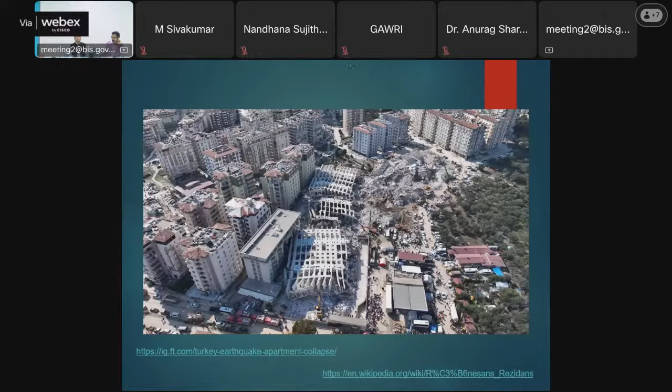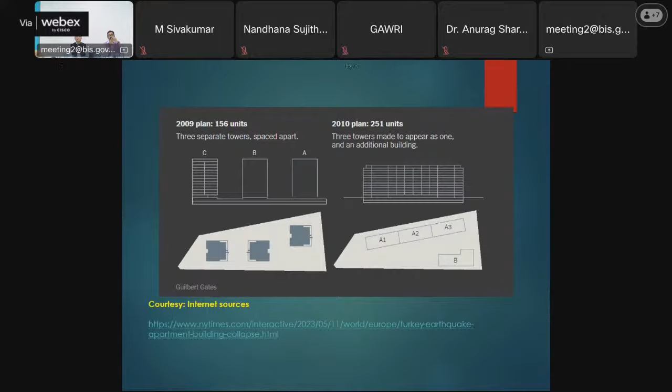There are some links in this particular one; you can see these links later on also. There are some interesting facts about the failure of this building. This was the initial plan: 156 residential units were to be constructed in 3 separate towers with a common underground parking. But ultimately over the next year, there was a change in the scope of the building. It got converted into one long block and one additional block. This is always permitted. This is always doable. Only thing, we have to re-engineer. Did they do this re-engineering or not? That is what is given in the link down below. But I'll just mention what are the perspectives.

The municipal advisor, because at local level all the building plans, their services, their structural drawings are submitted and examined and building construction permit is given, said, such a complex building, I do not have the software. That is one perspective. The other person, the inspector who has to go to the site every now and then, right from the foundation pit depth up to every floor casting level, said, I have signed many papers, but not of this building.

Most important is a faculty researcher who said, why wait until earthquake? This is a puzzling building. It should have fallen well ahead. Till date it was there. That itself is a miracle, because there are a lot of structural issues in this particular building. There is no continuity of vertical structural members up to the foundation level. And more importantly, the contractor or the builder, of Renaissance, says that I followed the codes, but the regulations were insufficient.

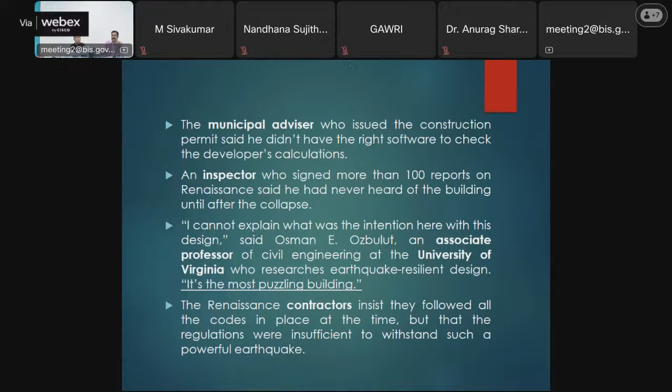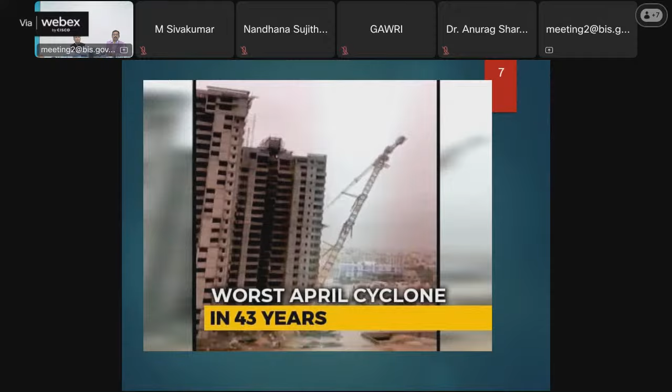This view of the builder was not legally correct. Ultimately, it went into a legal tussle, and the owner was put behind bars. Unnecessarily, people were put to danger, and some of them even lost their lives. Of course, in our country, we do all these things. We follow the engineering practices, and considering the flora and fauna, we ensure that good buildings are happening. But we are also planning for all these worst cyclones, lightning, thunder, etc.

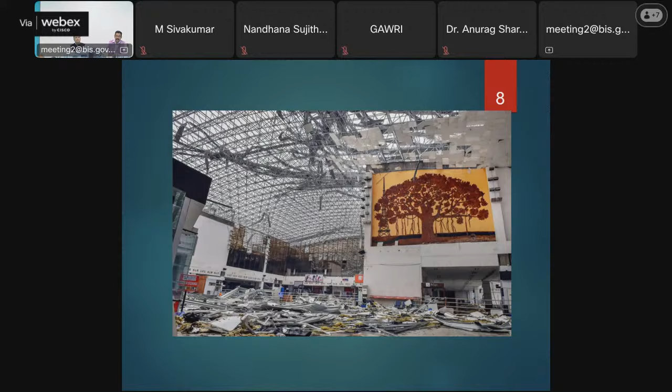So, but the Indian standard provisions say in IS 875 or in IS 1893, which is getting revised, all of these are giving you safe provisions to ensure that your buildings are safe. This is a simple jointing issue. The structure is intact, but it was not secured to the parapet wall. So it just flew away during the cyclone.

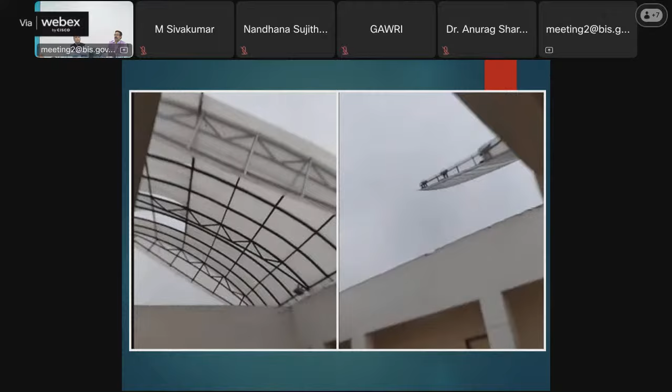So I'll stop here. All these can be very much avoided if, for example, the detailing practices can be done by the person, the structural engineer, the site engineer, etc. So these things should be avoided. So what as a building code is this BIS giving to each one of us, say as a student, as a professional, or as a researcher, etc.

To explain to us about these building code provisions, I am formally excited to invite our engineer Amandeep Garg ji, who is the managing director of Creative Design Consultants and Engineers Private Limited, based in the NCR region in Greater Noida. He has his own team of more than 45 engineers, architects and professionals, and he has been a member for more than 15 years of various standardization committees in the Bureau of Indian Standards, be it on earthquake engineering CED 39 or CED 7 on structural design, and importantly, he is a member of many panels on the NBC on structural design.

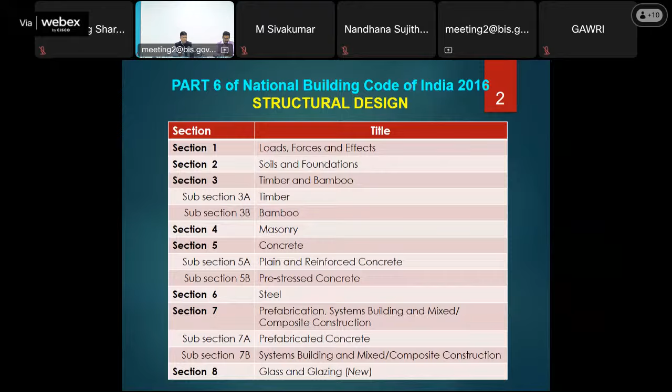Now, coming to the load forces and effects, section 1 of this part 6. In this, generally, we consider different types of loads. The NBC guides us about the different loads that we have to consider. IS 875 gives us proper guidelines about how to take the different loads and effects into the design calculations. As our current way of structural design is force-based and prescriptive in nature, we have to calculate everything based on the available codal guidance on loads.

IS 875 Part 1 is about dead load; it basically gives the densities of different materials so that we can calculate the dead load on the structures, or sometimes the self-weight of the permanent structure. Part 2 is the imposed load. IS 875 Part 2 guides us for buildings which may have different areas and applications. A building may be a simple dwelling, an office building, an industrial building, a hotel building; it may have special requirements like large kitchens or large libraries. So for different functional uses, there will be different imposed loads.

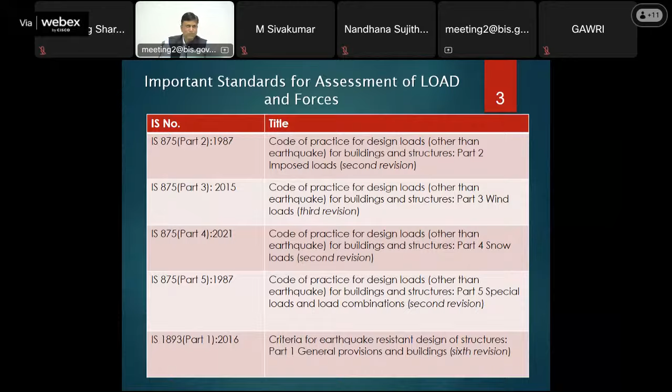Now coming to construction materials. When we talk about materials, masonry comes first in our mind because it has been traditionally used. So in masonry, when we have to design safe buildings, especially with unreinforced masonry, IS 1905 gives us very good details, and our National Building Code 2016 covers all the structural requirements in detail for masonry design. I would suggest that every engineer should read IS 1905 once, because generally this standard is missing in our college curriculum.

In our urban, non-urban and rural areas, a lot of buildings which are not high rise, maybe 1 or 2 story buildings, are constructed with masonry structures, load bearing constructions. More than 50% of constructions in our country have been with masonry, but our engineering colleges have not been teaching this. IS 1905 is a very comprehensive, excellent document for everyone to read, explaining basic concepts of masonry structure design, slenderness requirements, brick strength, mortar selection, and opening requirements. This is the good document for designing load bearing masonry construction.

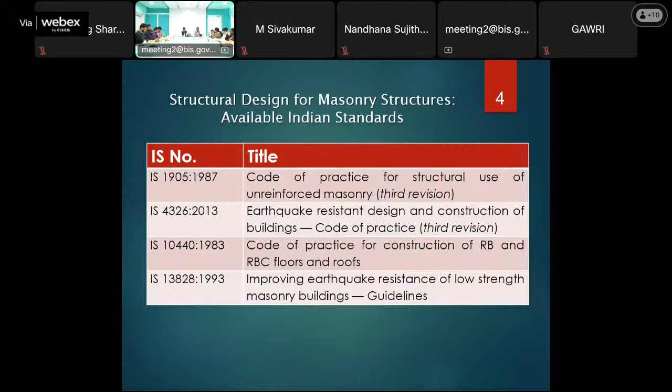Now coming to the popular standard IS 456, which we have been using for design of RCC structures - plain and reinforced concrete structures. I will be discussing many things further in this session. This is the basic code which guides us on how to take care of bending moment, flexural forces, tensile forces, shear forces, torsion, and in-plane and out-of-plane forces and bending moments. All these things we deal with in building design, taken care of by IS 456 guidelines. IS 13920 is again a very important document, which I will discuss regarding important aspects of earthquake safety.

This standard was earlier published in 1993, and during my graduation phase, it was just recently updated. Something called ductile was not a concept in the engineering fraternity before that, and then it has been updated in 2016, with a lot of improvements being done for these ductility parameters.

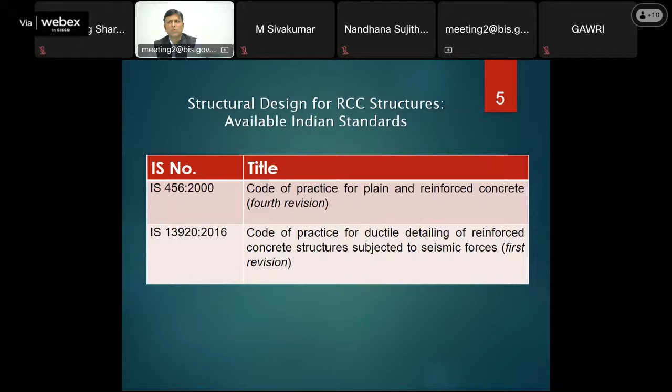So this document gives us a complete detailing system which can help us in earthquake safety. I will be talking about this during some discussions.

The crux is that in our country we have a lot of constructions which are non-engineered and some which are engineered. Non-engineered constructions are those which are not following engineering principles or structural design parameters, and are traditionally built based on the wisdom of artisans or whoever is making them.

Sometimes we call them mason or Rajmistri. So it is up to them to decide, and the building owner does not know how to construct. They just give the work to some agency or mason, a so-called expert who has no engineering knowledge but has learned through traditional construction practices from their fathers and forefathers. These are non-engineered constructions, and some people still believe this is good enough for their small construction.

But I would like to mention that if there had not been changes in construction systems, probably non-engineered constructions could have been accepted. But now everybody wants more space, so the thickness of walls is getting reduced. People want larger rooms, so spans are increasing. With these changes coming up in construction, without any computation of forces, bending moments and engineering know-how, somebody may go wrong based on their experience alone.

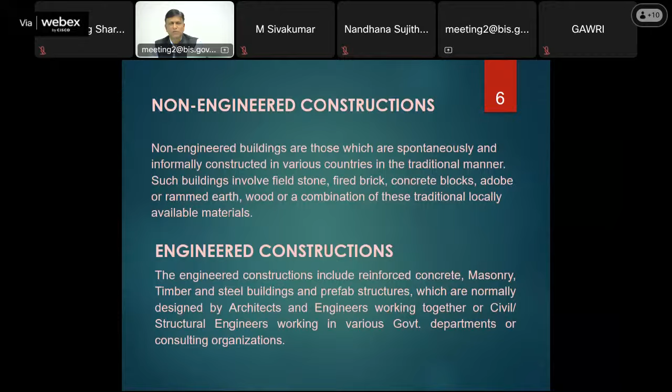They cannot compensate for the requirements of thinner construction and larger span constructions. So we have to move the entire country towards engineered constructions, whether of masonry, timber, bamboo, or anything else—it has to involve thoughtful design, calculated forces, calculated risk, or calculated safety. If we know the behavior or performance of what we are making, then probably we will be going in the right direction.

So we have to move towards engineered construction. And for engineered construction, what should be our aim? Our aim should be that structures perform satisfactorily during their intended service life.

I used the phrase intended service life because, as I discussed, some structures may be temporary construction with maybe a 5-10 year life. Some may be for 50, 60, 80 years, and some may be for more than 100 years. So whatever the intended service life, the structure should perform satisfactorily. This should be the first aim of engineering design or construction.

The second part is to sustain all kinds of loads and deformations of normal construction and use. Why did I use the word deformations also? Generally we calculate for forces, but there will be some deformations as well—due to temperature, we will have high temperature expansion, winter season shrinkage. So there will be some deformations.

There will also be some ground movements. We will discuss this further, but here I would like to point out that when we define a soil bearing capacity, it is defined along with some ground settlement—there is nothing called zero settlement SBC. So when we talk about different foundation systems, we thoughtfully consider what could be the allowed settlement for a kind of foundation system, and based on those settlement assumptions, we calculate our SBC.

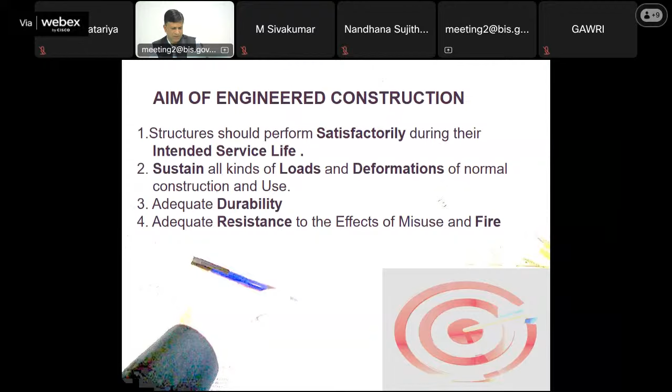Sir, if I can ask you a question here. There are reported incidents of fire in some buildings, be it residential or commercial. What is the actual procedure to permit continued occupancy after that fire incident? Is it simply firefighting and replacement of electrical fittings, or what should be done?

It's a very, very important question you have asked, Arunji. Generally, what happens is that after the fire, there is a lot of dark smoke in the room, and after the firefighting, people just clean the room, change the electrical installations, and start using the building as if nothing has happened.

But I would like to mention here that because of the fire, if it has been strong enough to give heat to the RCC elements, maybe columns, slabs, or beams, this heat, if it has raised the temperature of the RCC elements, can reduce the strength of these structural elements to a greater extent. It can badly affect the concrete strength as well as the strength of the reinforcement steel inside.

Because nowadays we are using steel of higher grade, say 500 grade or 550 grade. If this kind of steel reaches a temperature of more than 400 or 500 degrees centigrade, and then cools down, the strength of this bar may not be the same. It can go down by 10 to 20%, and sometimes with exposure to higher temperatures, the strength may go down by 30-40%. So the overall load carrying capacity of the structural members can go down.

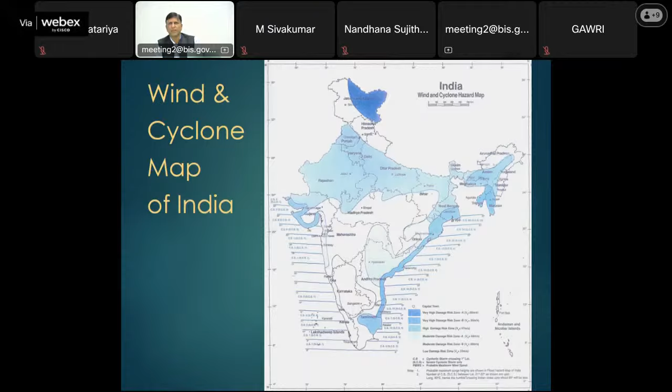Now, generally what happens is that when an engineer not having much exposure to how to design for the wind forces designs it for the gravity loads, for small buildings or small sheds, generally the gravity load is very less, because the sheeting has very less load, these steel structural members have very less load. So maybe you are getting, say, 1 ton load at the base for a column. Now for 1 ton load at a base, maybe you are requiring 300 mm by 300 mm size of footing, 1 feet by 1 feet.

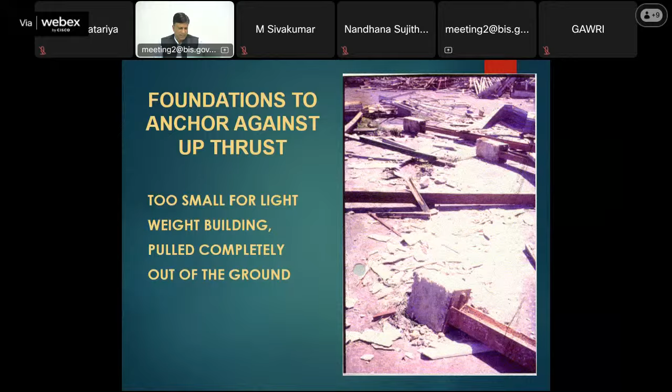Now you see this photograph. This is a simple portal frame system. And in our colleges, generally we learn how a portal has to be designed, for the wind forces, for the dead and live loads. And what is generally done is, suppose we have a portal at every 5 meters. So we take the design loads for 5 meters, design one portal and repeat. For many of our PEB structures also, this practice has been common, and in many countries this practice is being followed. Now, a few designers generally do the 3D analysis of these structures.

If the buildings are complicated, with different spans varying, then of course people generally do 3D modeling. But for simple portal design structures like hangars or these kinds of warehouses or normal buildings, generally people do the portal frame analysis, design the portal and repeat it.

Now what happens is that our code and the National Building Code suggest that in that case, we have to provide some bracings at adequate distances, adequate spans, because we have designed for this kind of wind, but if the wind comes from the orthogonal direction, the longitudinal direction, then what would be the capacity of your structure? Because in the other direction, you have not tied the system in a proper way. There is no proper resistance for our structure to resist that orthogonal force. So we have to provide the bracing.

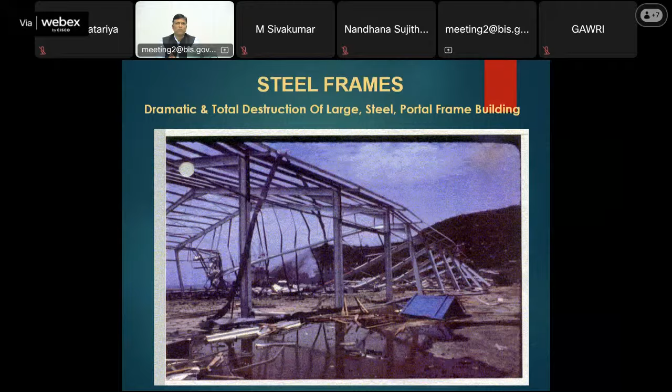And I would say that it was such an effect that the sheets which flew from one part of the building could reach almost half a kilometer away, putting danger to a lot of other people who were on the roads, because this metallic sheet, heavy and with very sharp edges, when it was flying like a kite, could harm so many other people. So it's a very, very risky thing. So what is the problem here? Why do these kinds of things happen?

Now, what happens is that in structural engineering, when we design, generally many structural engineers design for the portal system only. And they say fix the sheet as per the requirement, because sheet thickness and fixing details, etc., structural engineers generally were not considering as part of their scope. It is just the sheet and the contractor should fix it. But it's a structural element. In India, I have shown 6 different wind zones. So there may be different severity of the wind that the sheeting has to face.

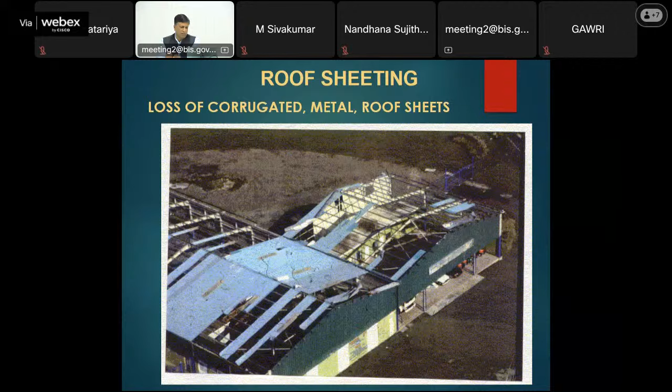The thickness also sometimes becomes inadequate if your spans are more or something like that. So sometimes you have to increase the sheet thickness also, because sometimes it is not just the failure of the anchor, sometimes it may be a failure of the sheet itself. So you have to see what should be the thickness of the sheet and how we have to make the fixing.

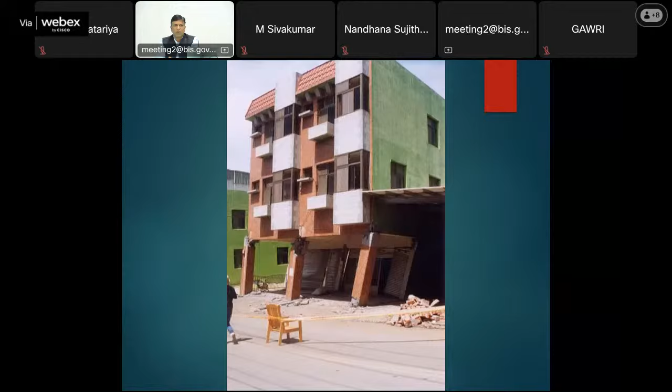When we have stilt floors, sometimes we have soft story. It is not that all stilt floors would have soft story, but stilt floors have a tendency to have soft story. Soft story means the difference between the upper floor stiffness and the lower floor stiffness is large. So based on the stiffness differences, the building oscillation may vary.

Stiffness is resistance to deformation, right? So the upper part of the building has a different resistance to deformation and the lower part has a different resistance to deformation. So what would happen during an earthquake? The earth is shaking and the building will also try to shake as per its stiffness with that earthquake force. And within the building, if there is stiffness variation, some part of the building oscillates in a different manner and the other part can oscillate at a different frequency or time period. So what happens then?

Suppose the lower part is going this way and the upper part is going this way. This can happen because they are not oscillating in sync. There is no synchronization of the complete building because of the stiffness variation. So the lower part is going left and the upper part is going right. Then what would happen? There will be a shear force or a tearing force. When we use scissors or a knife, what do we do? We have a tearing force which gives us the result.

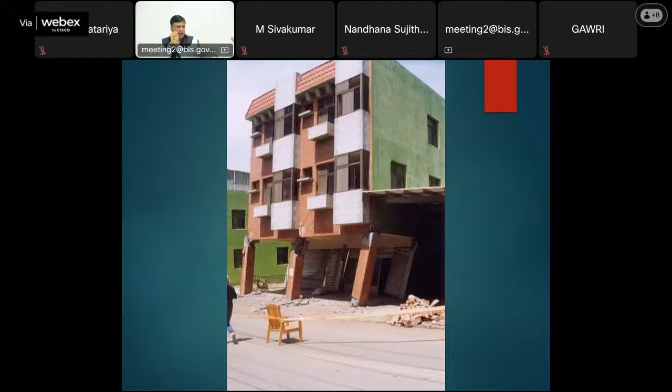So buildings themselves can experience these kinds of forces. The lower portion goes one direction, the upper portion goes the other direction, and this is the situation we see in this building. So how do we avoid this? The National Building Code and IS 1893 guide us that no such soft stories should be created in the building. Earlier, some engineers had the approach: if we have a soft story, let us make the soft story strong.

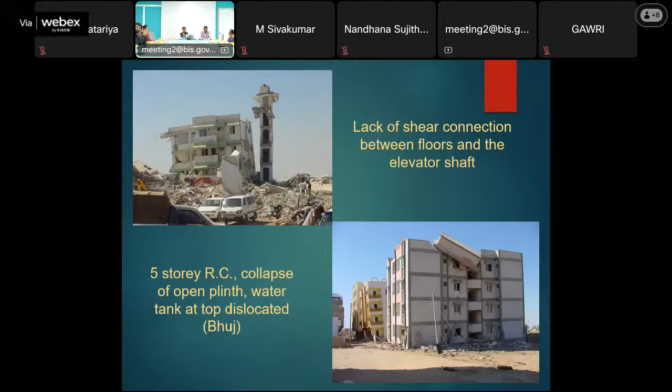Some people say that for small buildings there is no risk of the earthquake. But I am showing you the two pictures that even a small building, the government building, railway station building, if the structural systems are not proper, if the construction is not good, if the design is not proper, then anything can happen, even for the smaller buildings.

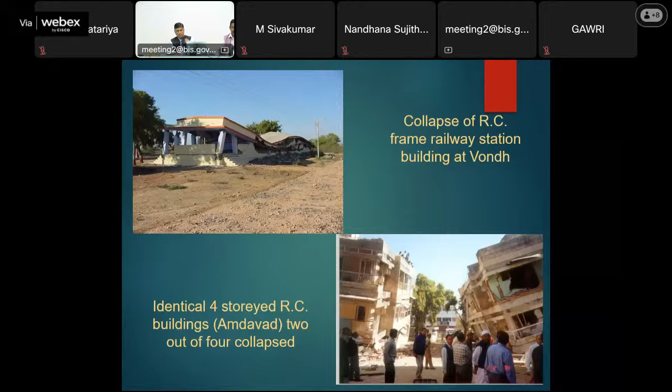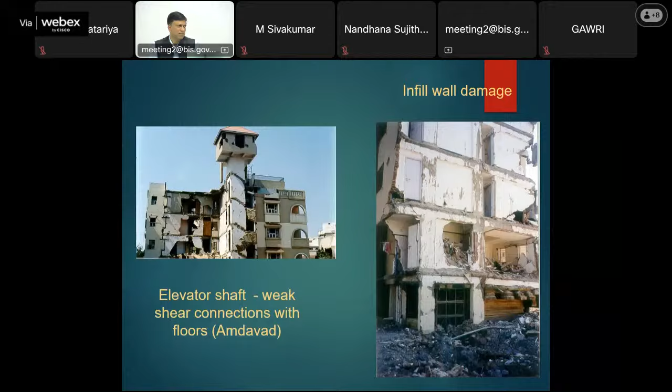Similarly, for other buildings as well, we can see this kind of images, which are eye-openers for all of us, that when we do not make proper connections, when we do not take care of the earthquake forces, or when we do not take care of the other forces as well, there will be some deformations, there will be some kind of aging effects also in the building, and if you are not maintaining it properly, then the building deficiencies can result in a lot of challenges.

Now, when there is an earthquake, you have folded something like this. So this is a box, I have folded it like this, and if there is an earthquake, it will shake like this. So this farthest part will have a lot of amplification. If this fixing had not been there, then it could have movement like this. But because we have fixed it from somewhere, it has moved like this. So this connection of the staircase has not helped, but has made this building fail during the earthquake.

So we need to imagine in our mind how the building would have its deflections or deformations when there will be an earthquake. And the earthquake force can come from any direction to any face.

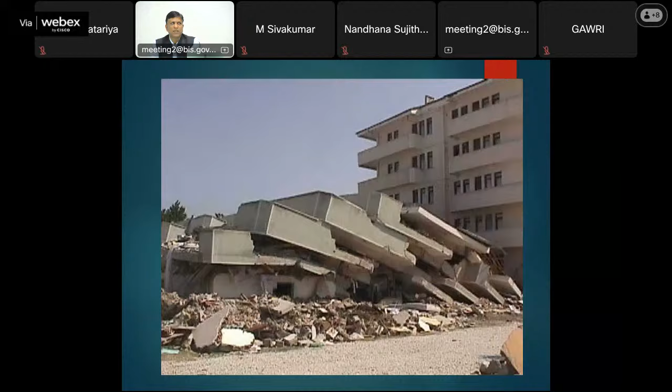So as Arunji has shown in the beginning also, there was one photograph wherein we could see one building failing and other surviving. Similarly, this photograph also gave us that clarity that if we make good buildings, they would survive. If we do not make or design good buildings, the buildings cannot survive and would fail. So at the same location, one building has failed like a pack of cards, and the other buildings are surviving without any damage. So who is creating it?

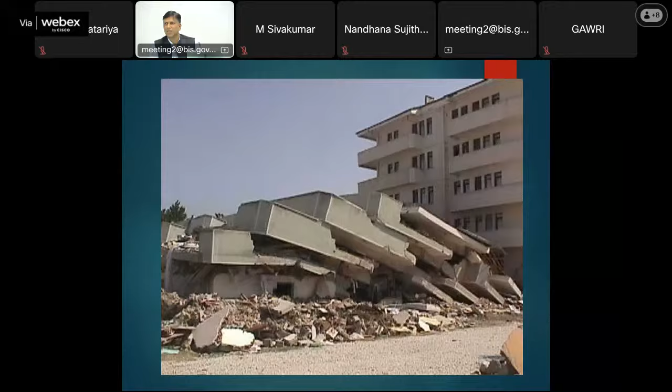We all engineers. We all engineers are responsible for failure as well as good performance. If we are not doing good work, we would see what is on the left side, and if we do good things, we will create something for the country which is on the right side. So the moral of the story, you mean, is read the Indian standards and read the building codes and do your design and your site work and execution also as per the Indian standard.

Thank you, sir. So quickly, another 5 minutes, I will try to take some more points. So ultimately, we have to be competent enough to do a good thing.

For that, we should have good attitude, skills, and knowledge. This BIS has been continuously striving to put more knowledge and skills for the participants, and you participants should have the attitude to learn and implement. If you implement all these skills and knowledge, then definitely we will be in safer hands.

I would now quickly take you through some slides which are part of my presentation, but will not discuss much, though it would be helpful for you to have some insight about these things. For good engineering development, we should have a holistic approach of having good design, selection of site, concrete technology, or whatever system of structural design we are having, drainage, waterproofing, inspection, maintenance—all these things have to be there.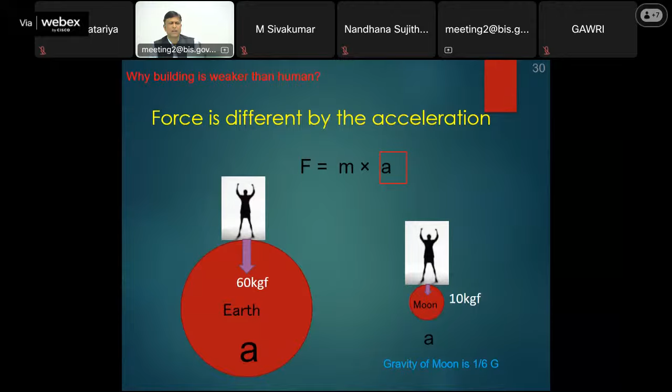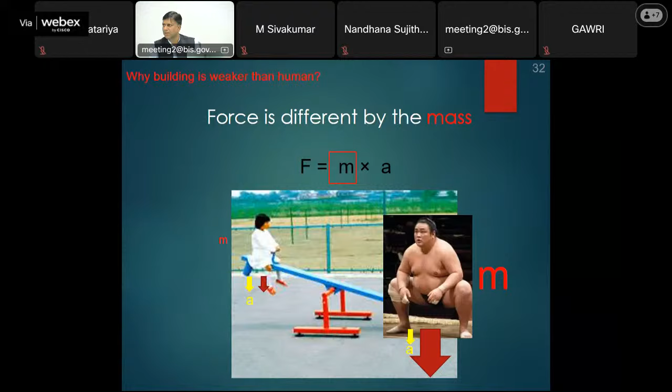These are the conditions of our earthquake. As I discussed, heavier buildings will have larger earthquake force, lighter buildings would have lighter force, because mass is important—it is the force created because of inertia, and inertia is mass into acceleration. If you have larger mass, you will have larger earthquake force, and if the ground acceleration is high, the force will be higher. So some slides are just to explain this inertia process.

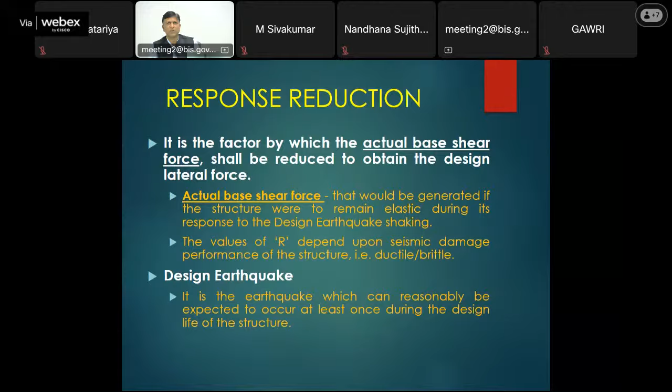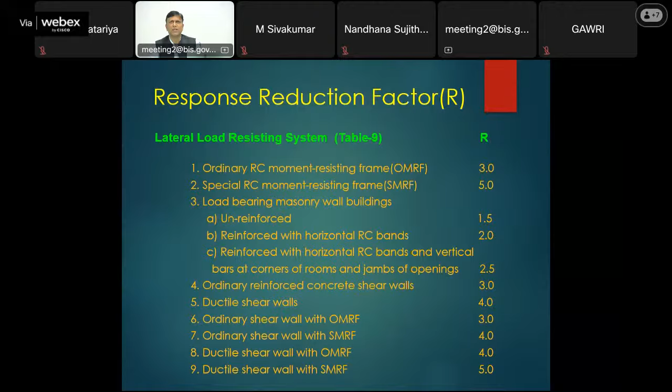This response reduction factor is an approach used in structural design. It is basically applicable for structural designers, so I would not take much time for that. These are the things used for earthquake force calculations.

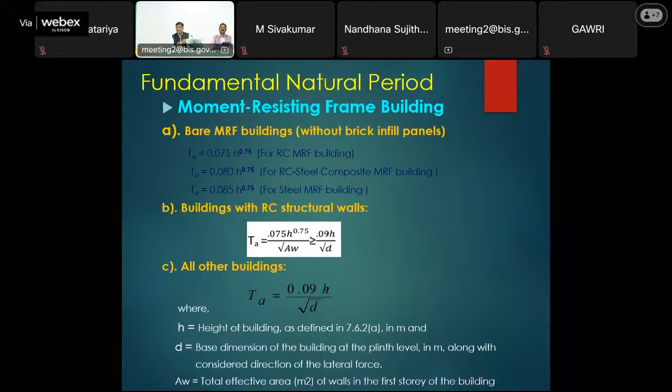Time period, the natural time period of the building, is important to understand. The code gives you the formula to calculate the estimated natural fundamental time period, which can be used for calculation of the force. I must tell you that at this moment we are designing based on the force system, but it may not be very far that we would design in a different approach, wherein we calculate not based on force but based on deformation, deflection, or performance. So it is now high time that we develop ourselves to have more knowledge about earthquakes and their effect on buildings.

So these are some slides which guide us on how to calculate, and the attributes needed to perform well during an earthquake. Our structural system should be very robust. As I told, we should not have any scope of soft story or weak story. There should be good lateral elastic stiffness so that our deformations are not too large, and required adequate lateral strength so that in case of lateral deformation, our building structural elements should not fail. It should have adequate strength and adequate ductility.

Now, ductility is very important to understand, and many people do not properly understand ductility, but just do it as per the guidance. Ductility is a kind of property given to a system which allows deformation without failure. So by providing ductility, we allow more drift or deformation, but the structure remains stable and sustainable. For economical design and high performance design, adequate ductility in the system is going to help us.

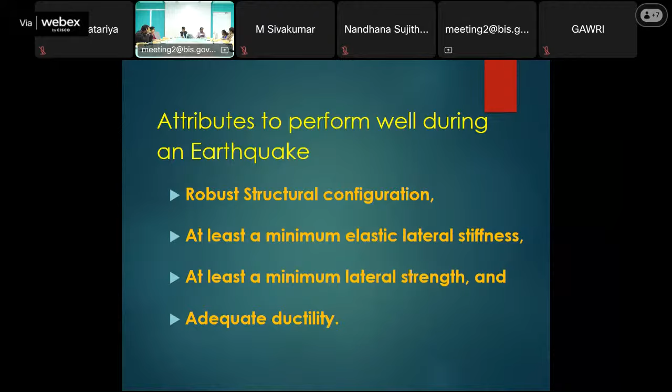Now, some people would say that the Taj Mahal or many other buildings constructed hundreds of years back were not designed with ductility, so why does the IS code or our systems push for ductility? So we have taken some slides to show that we can have both systems: one is strength-based and the other is the ductile system. As per IS 456, we can design it either way.

But the difference is that with a strength-based system, our structural elements become very thick and the requirement of steel will be high. Then during an earthquake, if the force is slightly higher than designed for, the structure will fail. But when we provide ductility, we allow a lot of deformation, which saves money since structural element sizes reduce. You provide junctions to handle excess stresses also. Generally, when we design in the elastic zone, we restrict stresses to that zone only, but when we provide ductile detailing, our stresses can go beyond linear action.

It can go to the non-linear action. It can have some deformation at the junctions, and some steel can yield. Because of the yielding of the steel, a lot of energy from the earthquake can be absorbed, and your building can be saved from failure. So there may be some connections that get broken because of yielding at some locations, otherwise the building will be safe. So you are saving money as well as providing better safety. That is why we insist on ductility.

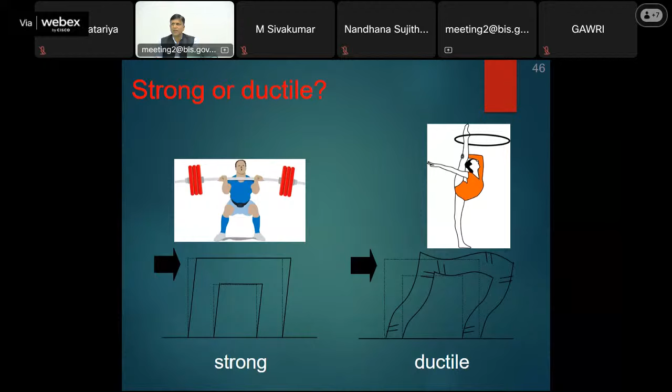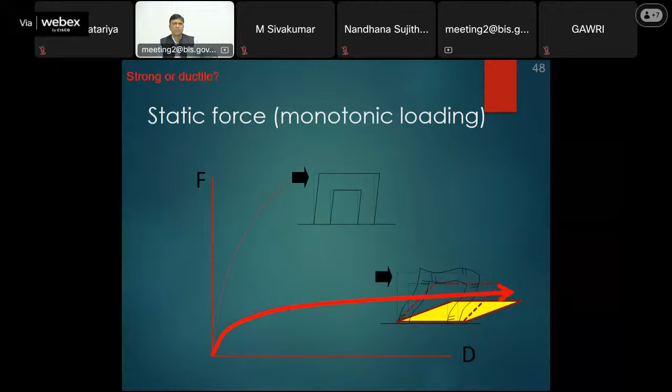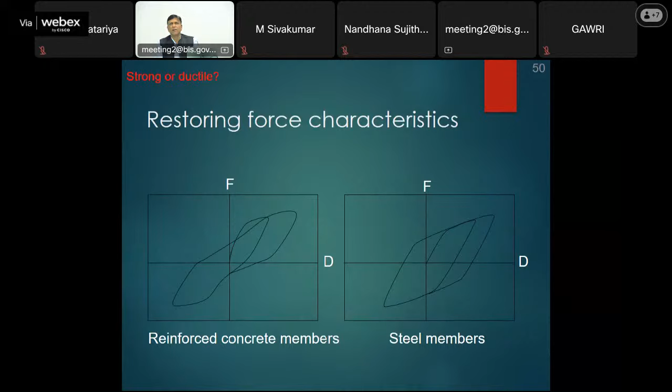I will not take much time. These are some comparisons of how ductility can help. The energy absorption in a ductile system is fairly high. The area we see here is the hysteresis loop, which gives good performance when designing with ductile design. In case of non-ductile design, this hysteresis loop is not well defined and your structure can fail very quickly. So in this slide, the bottom part, the flexible or ductile part, has a lot of energy absorption capacity, whereas in the strength-based design, you have very little capacity for energy absorption.

Generally, without earthquake considerations, we probably feel good with strength-based design. But when we are in earthquake zones, we cannot take that chance.

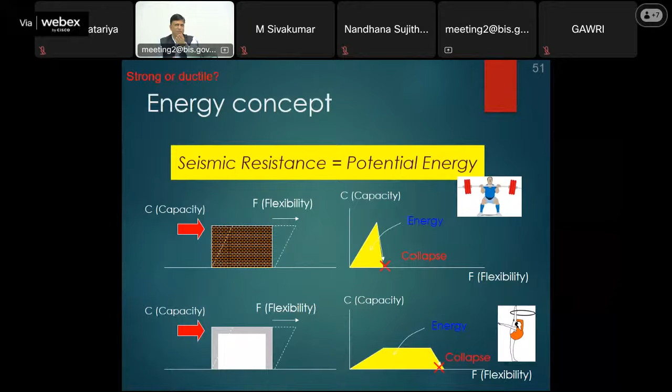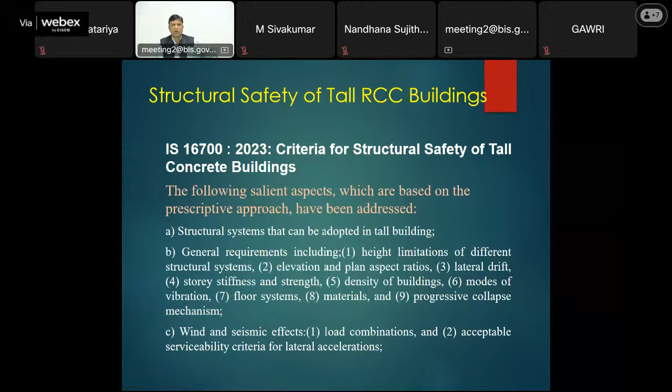So these are some earthquake safety requirements. I am just skipping through. We have a special code for tall buildings, IS 16700, which gives us the structural system, analysis part, detailing part, and all the special requirements for buildings having more than 50-meter height. These are covered in IS 16700, and this is also very important when we go taller. These are the special requirements for ductility.

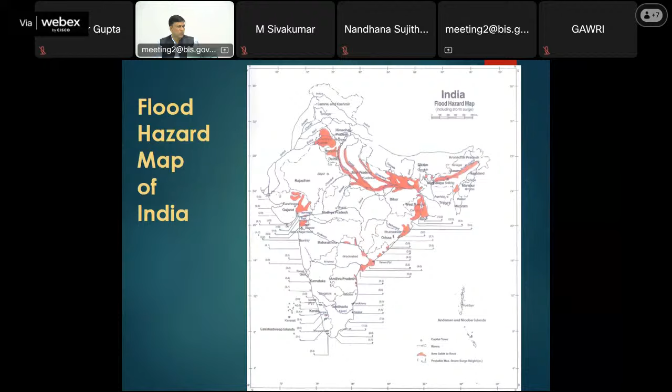Now coming to the hazard map of India, wherein we also have floods to consider during design. How do we take care of flood risk? We see this kind of images on television in July and August, when there is heavy rainfall and many areas go under water. For that we have an IS code, and we should have proper safety for foundations, because generally the soil below the foundation moves and buildings come into distress. So if we know these are flood-prone areas, we have to take care of the foundation as well as the superstructure.

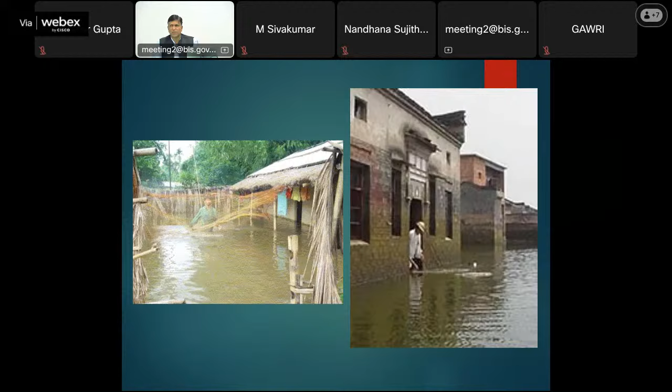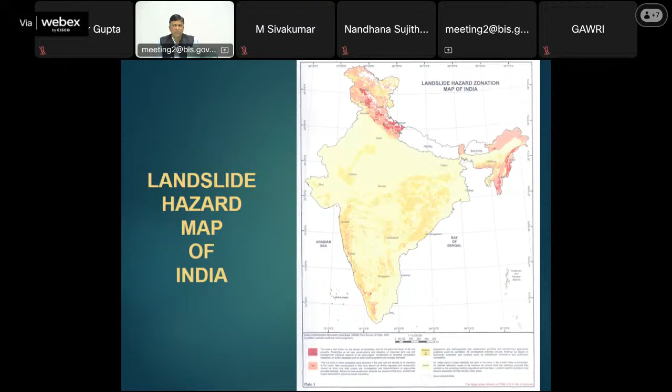We have landslide areas in our country. We have many hilly areas where the mountains are not strong enough to hold, and during the rainy season landslides occur. So we need to create an environment where we do not develop in landslide zones. If we see the risk of landslide, we should not put any construction there. We should try to save people.

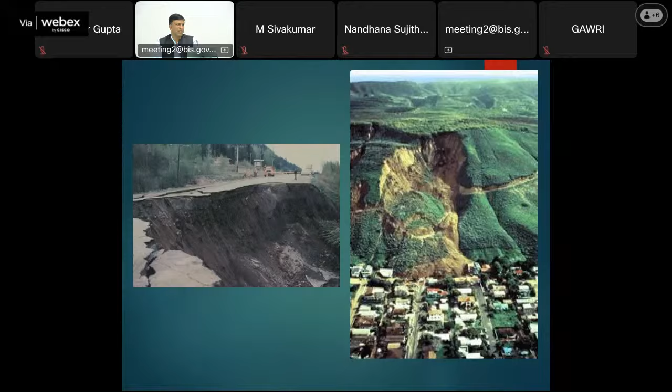Now you see this photograph. There is a city developed below a loose hilly area, and see what would happen if this hillock... you see one sign of a past landslide already, but people have not learned from that. If another big chunk comes down onto this civilization, it will become a civilization of the past, because after hundreds of years people will say there was some civilization there. So we should not develop areas which are risky. We see this kind of photographs.

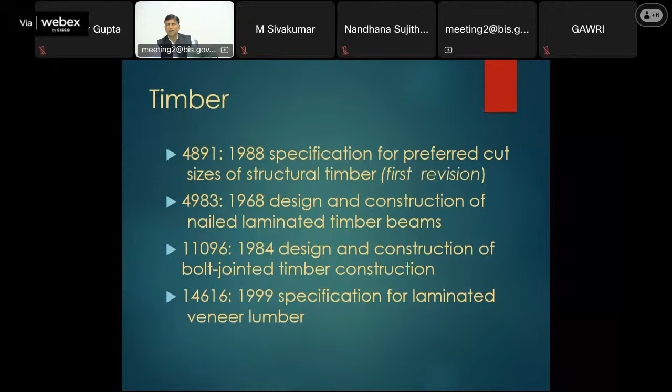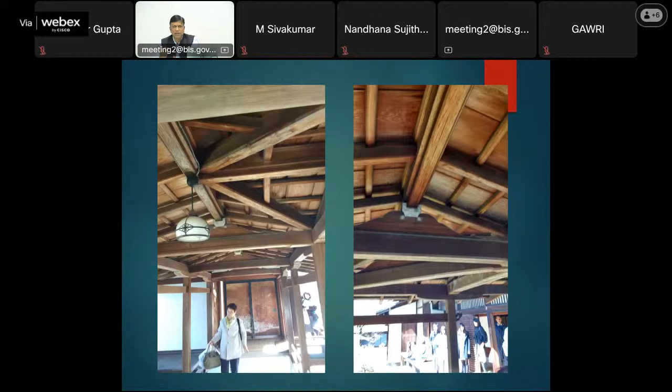Now, these are some standards that take care of timber-based structural designs. We have very great detailing and design requirements given in the IS codes. These photographs of timber were taken by myself, and these are some photographs from Japan, where they have very good buildings made of timber. I must tell you that in earthquake zones 5 and 6, which are very earthquake prone with high accelerations and high risk of forces, we need to go for lightweight construction systems. In hilly areas we get good timber, and lightweight construction has sustainability too, because if you are transporting concrete 300-400 kilometers to construct something, whereas if you readily have good timber there, it is good both for sustainability and earthquake safety.

So you can go with this timber system. You can have multi-story buildings with timber design. They are light in weight, and very light in weight materials have very good ductility as such, because wood is a very ductile material. So we can give good connections to them and create very sustainable development in high earthquake zones also.

Now coming to bamboo — yes, of course, in our National Building Code, the level of detailing we have in our country probably no other part of the world has.

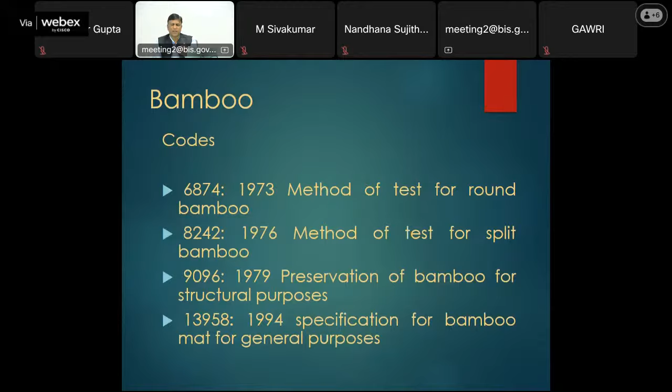You can have proper connection joints, everything we do for other kinds of constructions. You make foundation with RCC, bevel joint, and group bamboo joints, beam column connection joints. All these things can be done.

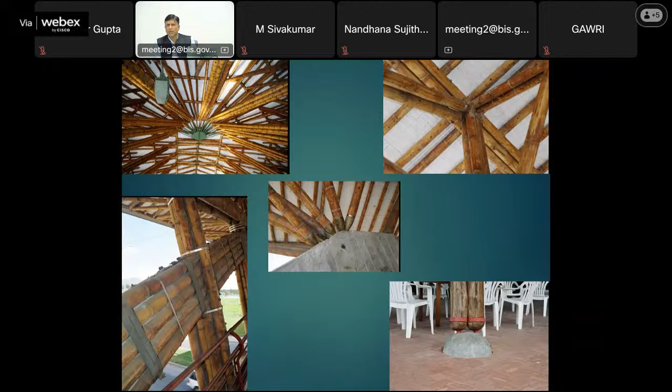With this last slide, I would like to say that it is not natural disasters which kill people, it is the inappropriate built environment which collapses and kills. It is not only earthquake or wind or anything we should blame. It is all about us. If we do something good, we can create good things. So we all engineers must strive to contribute to a built environment which is safe and habitable. Thank you all for your kind attention. Thank you very much.

Thank you very much, sir, for your excellent lecture, mentioning that structural design is not only about RCC or steel. The building code has a variety of other options, and more importantly, there are towns, cities and professionals in the country doing designs using only masonry, going for multi-stories, timber, bamboo, and even glass-based construction is possible. Precast concrete also you touched upon, and more importantly you highlighted the importance of attitude, skill and knowledge. Whether we are in college or just out of college, we have got some knowledge, and we should have the attitude to continue to learn and seek, so that all our structural designs or professional services are provided with good intent.

So excellent lecture, I would say, sir, from you as usual. And more importantly, this particular lecture is going to remain continuously on our YouTube channel also.